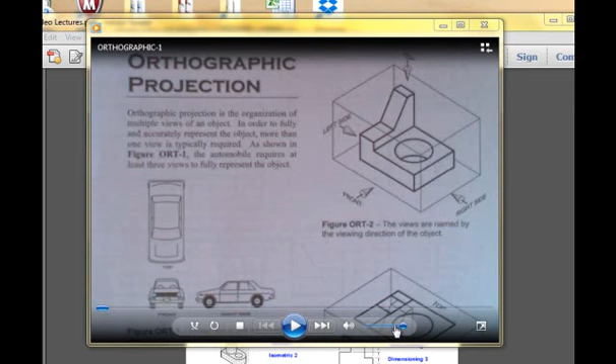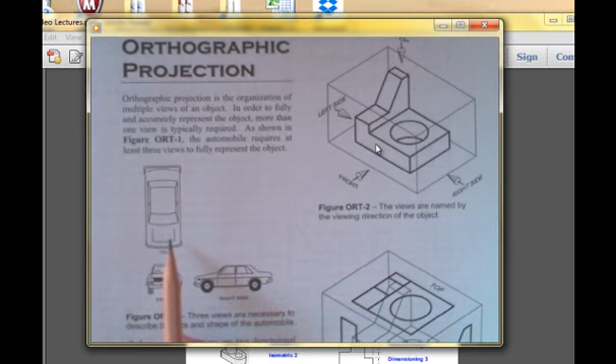Before we begin working our first plate in orthographic projection, let's take just a moment and review a couple of concepts. As illustrated in your workbook, with orthographic projection, I have a front view, a right side, and a top view. My right side view is directly across from my front view. My top view in our system of projection is always over the front view. And notice how, once again, they line up.

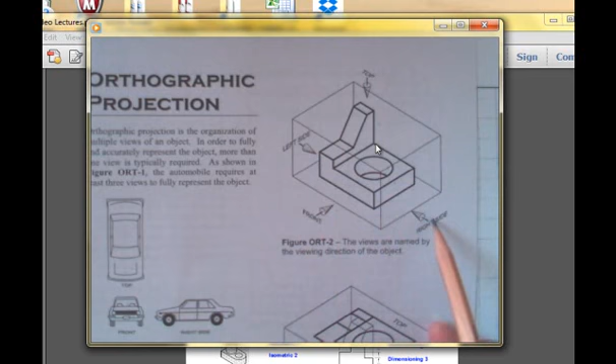If we were to take an object like this and turn it so that we can see the object three-dimensionally, then place it in a glass box, it would look like this. Front view, right side view, looking down from the top.

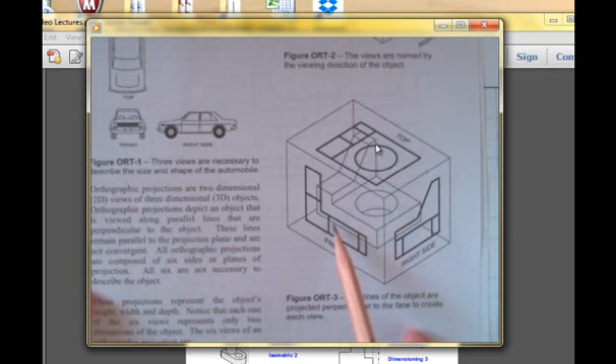If we were to take those three surfaces that we see, the top, the front, and the right side, and project them to those glass box surfaces, we would have our top, front, and right side. All we would have to do then is stand the top up and flip the right side out, and we would have our three-dimensional object represented two-dimensionally in three views.

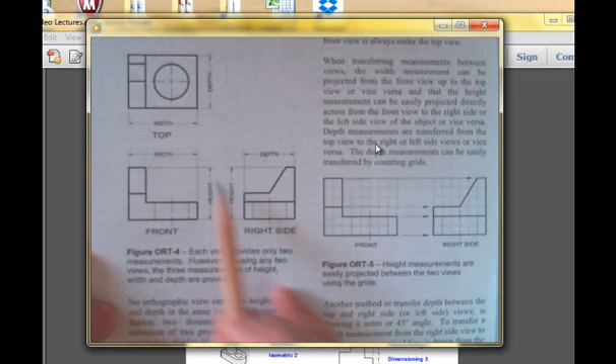Now, with that in mind, I'm going to take the front view, right side, and top view, and notice that they line up from one view to the next. And just to make sure that you see where these are coming from, front view has width and height. My right side view has height and depth. The top view has width corresponding to the width of the front view and depth.

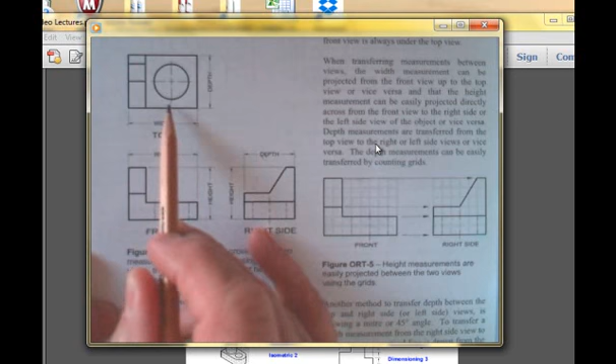Now, I only have three dimensions, width, height, and depth. However, each view has two dimensions, and no matter which two views I choose, if I only had two of the views, I still wind up with all three dimensions: height, width, and depth.

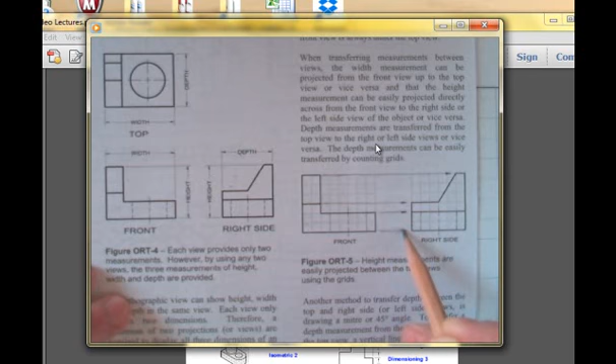On the right hand side, if you'll notice that the objects are drawn on a grid system, you can project along this grid system, and you'll notice, for instance, that the height corresponds from one view to the next.

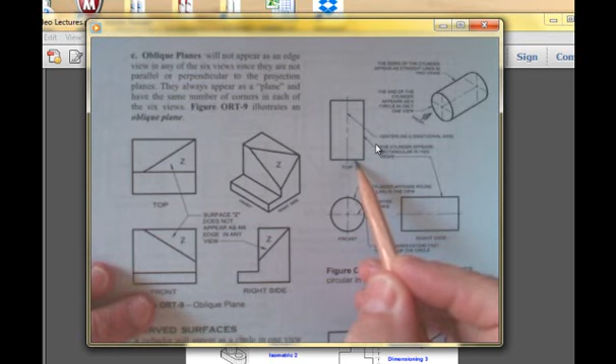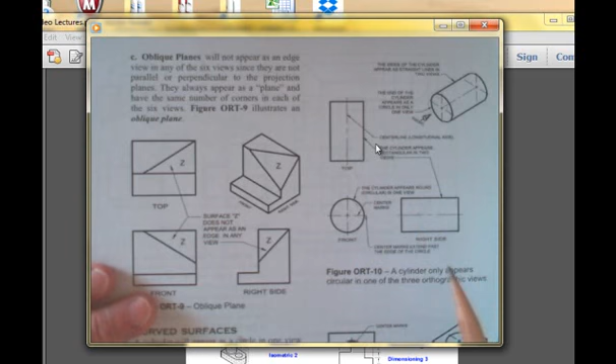Let's talk for just a moment about cylinders and holes and how they're going to appear. If this is my cylinder and I have a front view, right side, and top view, you will notice that even though it is round as it appears in this isometric view, this pictorial view, it only appears round in one view. The other two views, it appears rectangular.

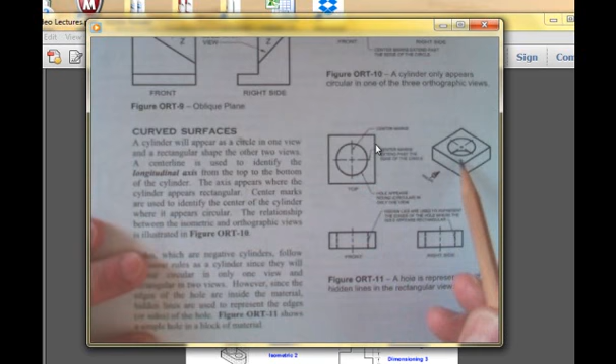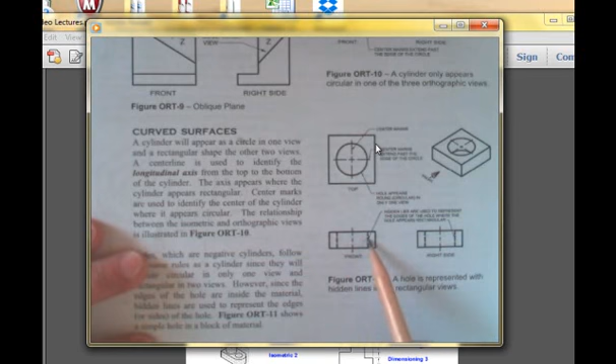If I go from a cylinder to a negative cylinder, which would be a hole, I've got a block with a hole in it. Notice that it appears round in one view, rectangular in the other two views. However, I'm drawing the outer edges of the hole here with hidden lines, and that represents the edge of the hole or the edge of the negative cylinder.